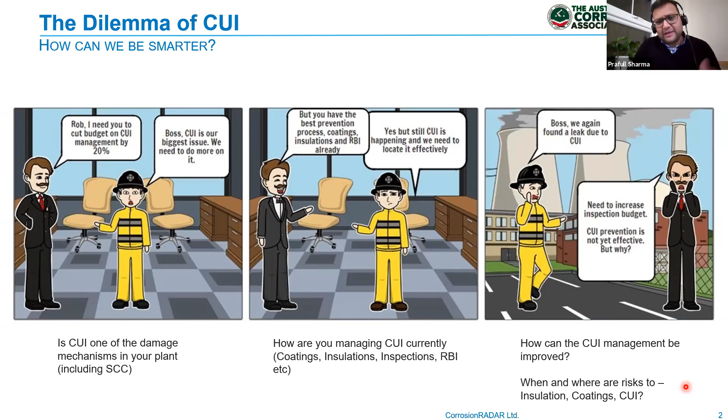It's a systems issue. So what is this CUI? Corrosion under insulation. I'm sure there are a lot of experts out there who know much more than me on this topic, but CUI is among the top asset integrity issues.

Australia is no different in this aspect, but these are global issues. It's not only tropical climate in Southeast Asia, it's not only South America, it's still in America as well, USA, Canada. We hear about this problem widespread in Europe and the Middle East. So CUI is among the top asset integrity issues in oil and gas and petrochemicals, and now we hear it's also a big issue in other industries such as fertilizers and chemicals.

And now due to energy transition, people are still forward thinking on that. The majority of pipeline failures have been reported due to CUI in various shapes or forms. And in the case of offshore platforms, especially when we talk about the North Sea, more than 10% of the overall maintenance budget goes to CUI. So you can see why this topic is so important.

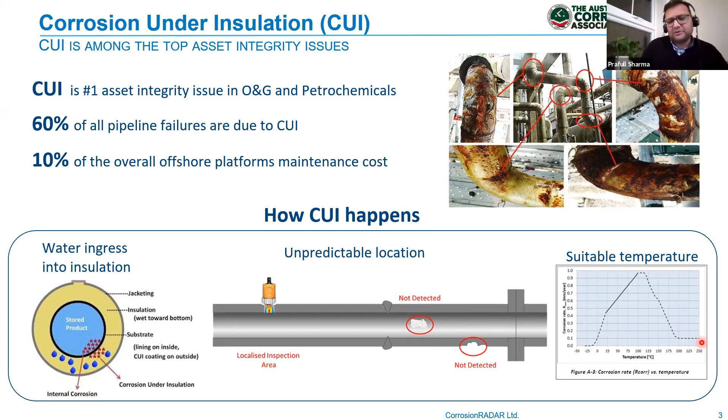But there are intermittent operations as well. Sometimes, for example, in the case of dryers or dehydrators in petrochemicals and gas processing, which go from minus temperatures to plus temperatures because of the nature of the operation. And it's a very, very bad, severe issue of CUI there, because coatings don't like these oscillating temperatures. So that's on CUI.

Now there's another element here, the predictive corrosion management. The world is moving towards predictive corrosion management rather than reactive, and it's being enabled by analytics, predictive analytics, and industrial IoT. I'm going to talk about that today from a CUI perspective.

The context of that is the current practice of management of corrosion is mainly through human judgment and risk based methods, combined with periodic manual inspection. Basically, it's reactive maintenance in the sense that the corrosion might have already happened, or it can lead to unscheduled shutdowns, so there's a safety risk. It's not a foolproof method, and it's very expensive.

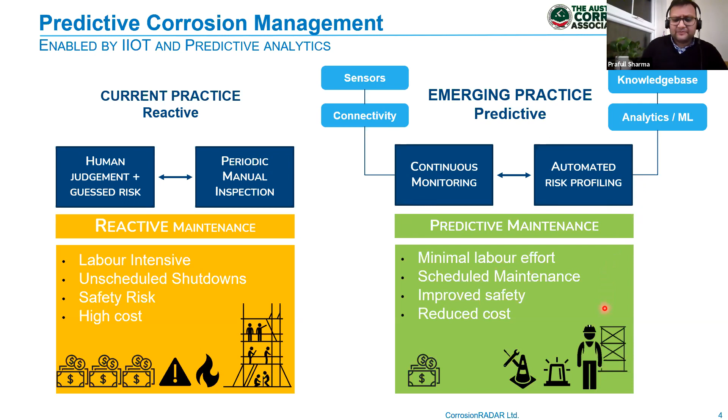Now people have moved to preventive methods, and now the emerging practice is predictive methods, where even online methods like sensors provide continuous monitoring, combined with knowledge bases and industrial guidelines to do automated risk profiling of the assets. This risk profiling means condition-based assessments, and the inspection can happen after that in a more informed manner rather than a reactive manner. So this is predictive maintenance to minimize cost and increase safety, and this is the new era which we are seeing.

Now, how does this happen? This is an example of what I represent, corrosion radar, but there are many other similar examples of monitoring through sensors. In this case, this is a CUI monitoring system invented by Corrosion Radar, a spin out of Cranfield University in the UK, where the original research and development happened. You see the sensors shown in orange colors.

They effectively cover a wide, long range. They're placed in various ways, helical or straight length, or even mesh or ring fashion, mainly to cover the assets and detect either moisture, so there's a moisture sensor, or in the same form factor, a corrosion sensor. This gets connected to electronics, which collect the data and transmit wirelessly to dashboards. It's a battery powered device and electrically powered device as well. Various wireless protocols are possible, but the unique benefits here are long range and spatial coverage, flexibility, and a decision management system with software.

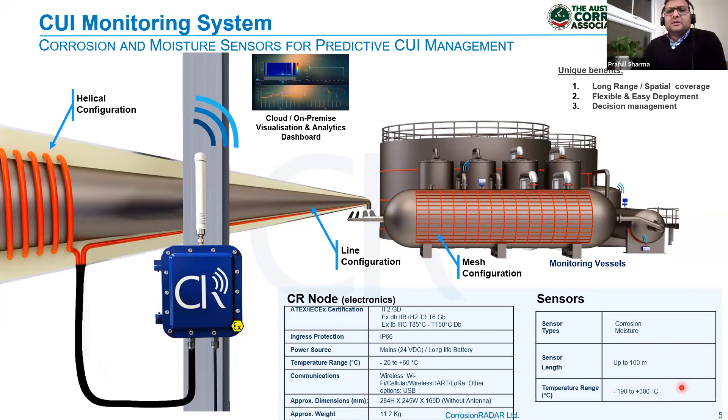So what is the principle of the electronics, the principle of measurement here? The core sensing principle is called electromagnetic guided radar, EMGR. This is a patented technique by Cranfield University and subsequently Corrosion Radar. It is based on wave reflection, or time of flight—basically electromagnetic wave reflection time of flight—to locate moisture or corrosion on the sensor.

So in this case, hypothetically, there's a pipe in black color, and at the top, the sensors are in close proximity to the pipe. You can see two hotspots getting developed, which are two risky locations, possibly due to water ingress at these locations. The moisture sensor: once water touches it, the local impedance of the sensor changes. It need not touch the pipe—the sensor is detecting everything on itself, so it's a kind of proxy to the pipe. The signal looks like a reflection, a peak signal coming from there, and based on the distance, it is located exactly where it is. That's where the inspection can happen. So it's a risk localization tool.

Happy to say that this technique, EMGR, recently got an award at the Corrosion 2021 conference for the MP Innovation of the Year award.

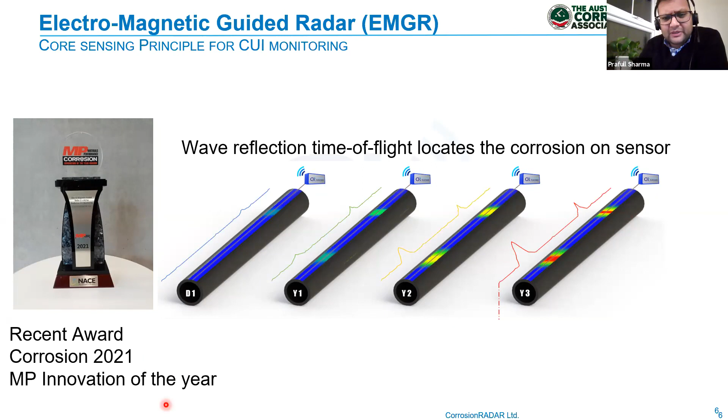Now what it enables is the era of risk-based assessments, especially dynamic risk assessments. Let me explain this a bit more. This is about optimizing inspections and increasing safety. What happens normally, on the left-hand side, is risk-based assessments or risk-based inspections. RBI is a standard practice in the industry, but it's very static—once you do it, it doesn't change over time. However, the risks are changing over time and we don't capture it.

So that's the problem. In this case, hypothetically, there are three assets, for example asset 1, 2, 3, and they have different risk profiles—consequence of failure and probability of failure being low, medium, or very high. Now this in year 1 will look very similar to year 5 or year 10 unless it is updated manually, and it's a huge exercise if it needs to be updated.

So this is not periodically updated, does not reflect field conditions, and so there's a scope of optimization.

Now the new era using sensors and online monitoring can convert moisture sensor data into risk assessments, and we have the ability that every year automatically the risks change from low to, say, in this case, if water comes in, it becomes high. In case of very high risk assets, it becomes low because no water is there, etc.

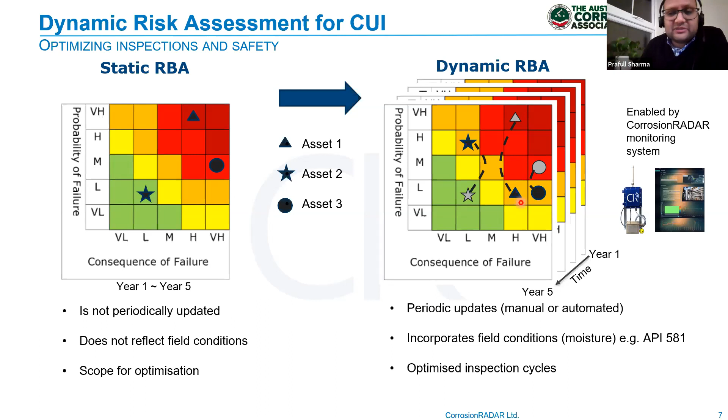So it's periodically updating manually or automated and incorporating industry guidelines like API 581, and this can optimize the inspection cycles. For example, asset number 2, which originally had low probability of failure, would not have been inspected, but now it is high, so it needs to be inspected at some point because it's a safety issue. Similarly, asset 1, which was very high, becomes low, meaning inspection is unnecessary because there's no evidence of water or risk there.

Now, how does this happen? The probability of failure in this example uses RP-G109 DNVGL guidelines. Similarly, API 581 is another guideline. Normally, the risk assessment uses a 5x5 matrix of probability of failure and consequence of failure.

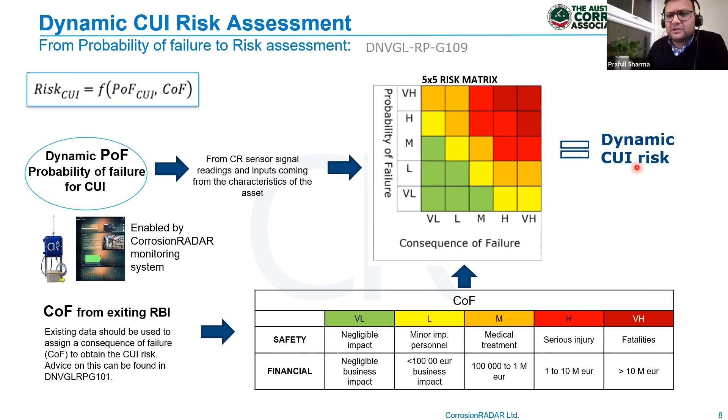The consequence of failure does not change over time—it may be safety or financial, depending on the type of asset and fluids. But the probability of failure can change over time because of water ingress and changing conditions, and that's what makes it variable rather than static using monitoring. That's what enables dynamic CUI risk assessments.

Now, these are examples of risk localization. So I talked about dynamic risk, but this is now a second step—localization of risk for optimized inspection scoping. This example shows integration of corrosion radar technology with CUI risk assessments based on API 581. There are two scenarios here which can help.

On the left-hand side is avoiding over inspection. There are two pipes here with a similar profile, but one shown in red color is very high risk. Red means very high. The conventional inspection scoping using RBI will very likely say this needs 100% visual inspection, which means removing the insulation—expensive. But if we combine it with monitoring, sensors installed are saying that, yes, RBI is saying red, but the sensors are saying these are green conditions.

There's no water or humid condition inside, but there's a slight issue somewhere in the middle—it's a medium type risk using API 581. Now, if we combine both pieces of information, we can optimize the inspection so we need not inspect all of it—we just need to inspect probably that one meter. So that will avoid over inspection.

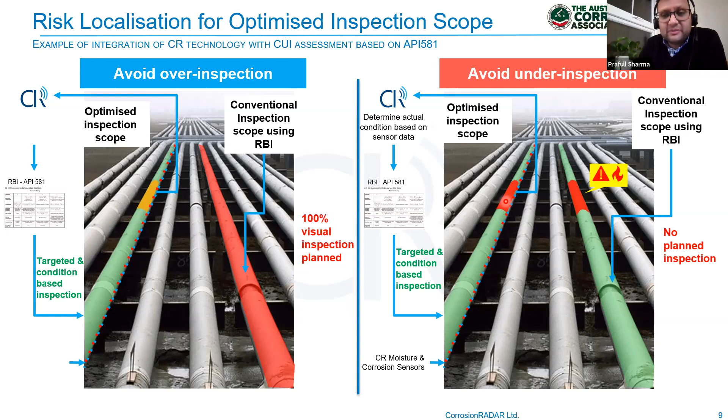And then it will recommend that, yes, it is indeed right that it's green, but no, there's a red condition developed locally. So go and inspect it at some inspection interval—this needs to be inspected for safety reasons. So this is the next step of combining with RBI: how can we take condition-based data to effectively define the inspection scope?

There are a few case studies I'll go through. This is a case study generated by the NZTC—it used to be called OGTC in the UK, Oil and Gas Technology Center. It's a consortium of North Sea oil operators and the government to validate and promote technologies.

So you can see over time the corrosion location, where the water was. You can really see the corrosion happen on the pipe, but also there is corrosion on the sensor, because the corrosion sensor is a coupon.

It's the longest coupon in the world. It self-corrodes, and then it detects where that coupon is getting corroded. Similarly, the white color is a moisture sensor—it detects where the water is touching the sensor. So the results of that are shown in this way here.

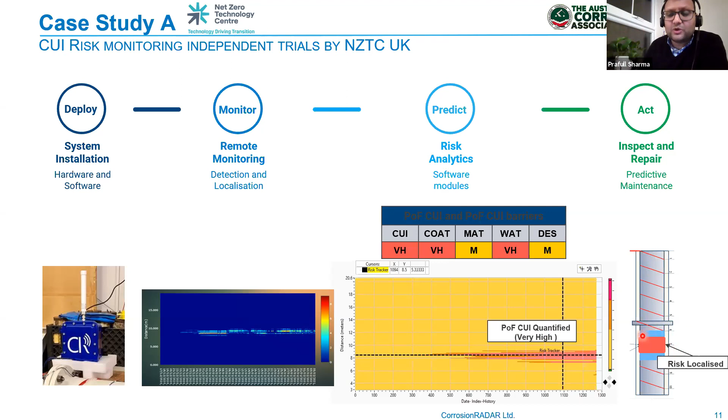And then the next step is to localize it—to say, hey, it is actually at this location, which is 8 meters from the electronics, and it is increasing over time with a very high quantification probability of failure. Finally, it is localized to an actual pipe: okay, this is the location where the risk is. If the inspection needs to be planned for the next 5 years, this is the location to watch out for, rather than the whole pipe. So this is how the optimization is achieved.

This is another case study. Corrosion Radar is partially owned by Saudi Aramco, so this is a published case study from there. This is a dynamic risk assessment of an LPG pipeline operating at minus 45 degrees Celsius in an arid climate in Saudi Arabia.

You may ask, hey, at minus 45 degrees Celsius, there's no CUI, there's no corrosion, but this goes through intermittent operation. I think this is a buffer unit, so it's sometimes shut down and goes to atmospheric temperature. That's where the foam glass insulation can absorb moisture inside, trap the water, and condense it on the asset.

So this system was deployed there, and again the similar process of system installation, remote monitoring the water. Actually, water was injected by the end users to do a validation and approve the technology. So in this case, periodically the water was injected at a particular location and it was detected rightly.

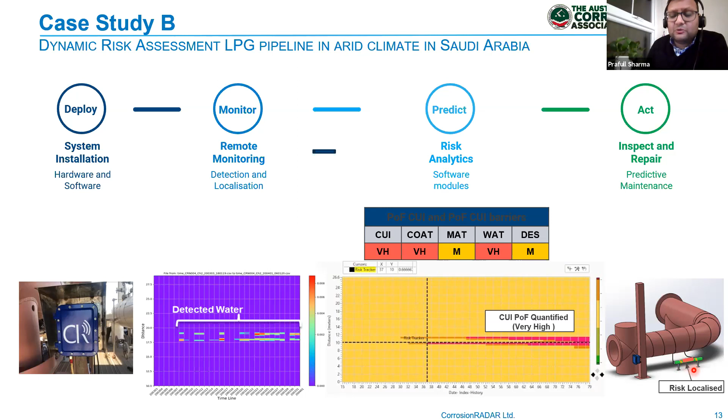Subsequently, the risk assessment detected a very high, aggressive condition, and localized it to a particular pipe route—the sensor was routed through a particular pipe for tests. In this case, again, the inspection would have happened at that location. So this is another case study.

Now this is case study C. I would say this is among my favorite case studies because it's closer to home—it's in Netherlands, and it's a production column. Now we are seeing a lot of interest in production columns or dryers and dehydrators. In this case, it's a 25 meters high production column.

This production column had a history of CUI, and the asset owner had to put up scaffolding every few years—I would say every 5 or 6 years—to do the inspection of CUI. I think this is a pressure vessel category which needs regulatory-driven inspection periodically.

But then they said, okay, we want to avoid that scaffolding, so we need to move towards condition-based monitoring. And that's where corrosion radar sensors were installed. You can see the orange colors on the top and orange color on the bottom, in a helical fashion, then connected to the electronics in the middle, the blue box, transmitting data on the cellular network.

You can see the pictures of the sensors which are wrapped around the asset with the mineral wool insulation, transmitting data. Now the objective here—we have not detected anything on this asset so far—but the objective is, if nothing is detected, they will skip an inspection cycle and save a cost.

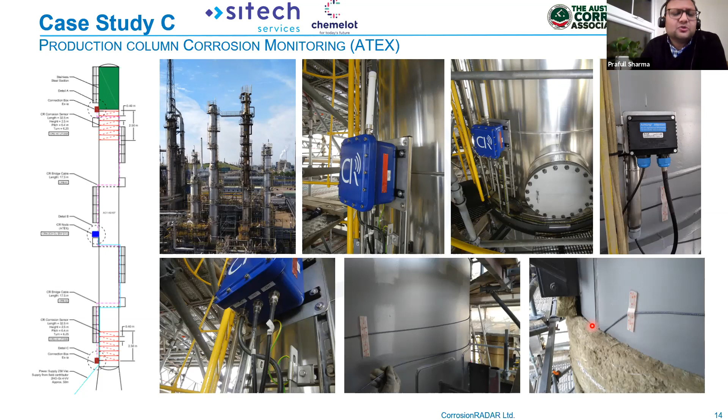But if something is detected, it will be highly localized—we will be able to say the angle and the height of that corrosive condition—and the inspection will be done through rope access rather than scaffolding, at a targeted location. This is a huge cost saving if it happens. It's been 3 years since installation, but so far no corrosive conditions, so it's good news for the asset owner.

So I would like to summarize what I talked about. It's about predictive CUI monitoring. I would go one step further, with moisture sensors and/or corrosion sensors, either or.

Now this is leading to data-driven RBI. We call it dynamic RBI, rather than a static process, making it dynamic and more informed for optimization of inspections. But also, if some people are not following RBI, it's fine. This is still early risk detection, leading to reduced unplanned shutdowns, predictive maintenance, and finally CUI prevention, because some of the asset owners, especially in Norway and Europe, are starting to say it's better to prevent rather than inspect.

Prevention is normally done through coatings or better insulation, but if we know there's wetness going on inside, then probably prevention can be done by mitigating that wet condition, because so far the industry is struggling with water protection. There's only so much we can achieve with coatings and best practices of insulation. So this is more of an assurance, additional monitoring tool, even for critical assets, to achieve efficiencies.

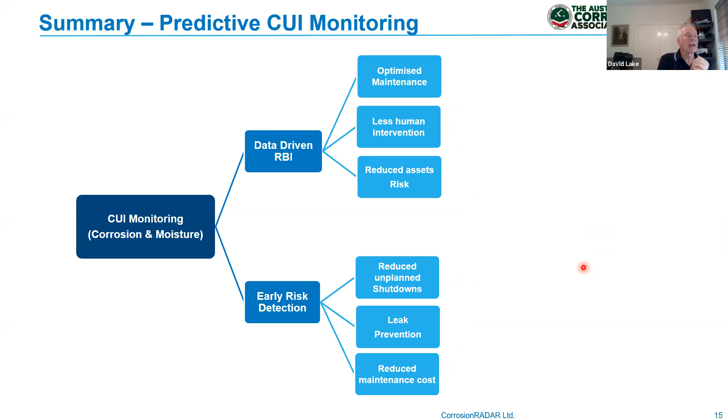That's a very good question. Normally we would suggest that because we are monitoring the pipe surface, it should be close to the pipe surface. For the operation, that's not a necessary condition, but it's an ideal condition if we can put it on top of the surface. However, there is a galvanic disconnection between the asset and the sensor because there is a plastic sleeve between them. So the ideal location, even with foam glass insulation, which I'm showing here as an example, is sensor directly on the asset surface and then foam glass insulation, because the foam glass insulation is closed cell. That's an ideal condition for installation.

So can it be installed further away and you still get meaningful results? The sensors function normally, they can even function outside. We test them on a normal table, so they function normally. However, the assumption here is they should represent the corrosive condition of the pipe or asset. So the closer we place them to the asset, the more realistic results they give. If we place them far away, the conditions they detect will not be representative of the conditions seen by the pipe. So it's ideal to have it in proximity to the asset surface.

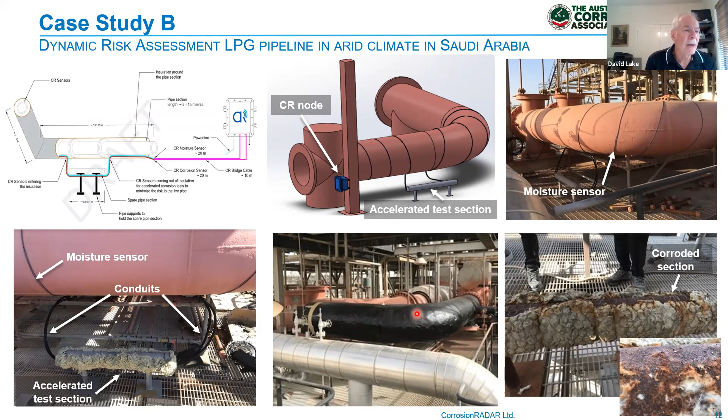Okay, and we have a question here around the pipe supports and how we manage around those areas.

Yeah, so this is, as I said, very similar to installation of a heat tracing system. So even when a heat tracing system goes around pipe supports, or in this case I'm showing a flange, the sensor goes around the flange in the same way, with an additional buffer length of the sensor. Again, the heat tracer also goes around it with an additional buffer length. So every installation is designed on site as to how the sensor layout is, with the pipe support being accounted for—it is installed in lieu of where the pipe support is and goes around it.

Now that's on the installation of the sensor. However, pipe supports, nozzles, or flanges are an interesting case of complex geometries leading to CUI, because that's where water goes in—that's a weak link. That's where moisture enters at the pipe supports, where insulation is slightly open and not perfect. So the sensor needs to be placed and routed through those locations to realistically cover high risk locations. I hope that answers the question of not only installation, but also routing it through those pipe supports and critical locations.

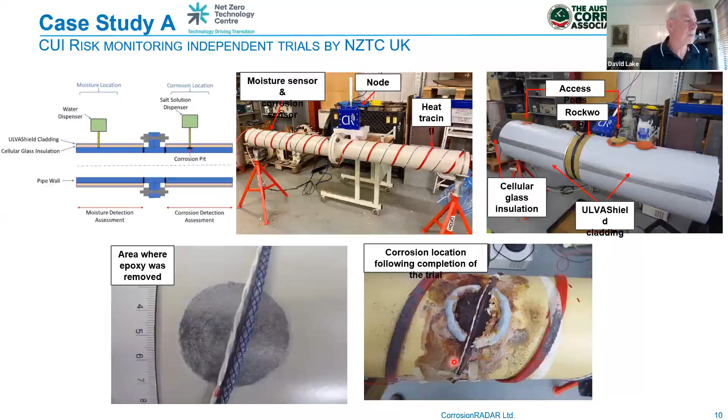Okay Praful, I'm afraid we've run out of time. Thank you very much for your presentation. There are a few more questions which I'm sure can be accommodated. You put your email address up at the beginning, and for those who don't know, it's very, very late in the UK, so Praful's probably going to leave us and go get some sleep now. So thank you very much for your presentation, Praful. It's been interesting, and I'm sure a lot of people will consider it on their high-risk piping and vessels. So thank you very much. Thank you for the opportunity, and feel free to contact us or Andre from APTS, and we will be happy to interact and talk more. Good, thank you for the opportunity. Pleasure.

Our next presenter is Dr. Thunyaluk Pojtanabuntoeng. Kod, we all know her and lovingly know her as, and Kod, you can correct my pronunciation. Yeah, no problem, you're not the first person to, you're not the only person. Okay, having trouble. Okay, just let me finish the introduction.

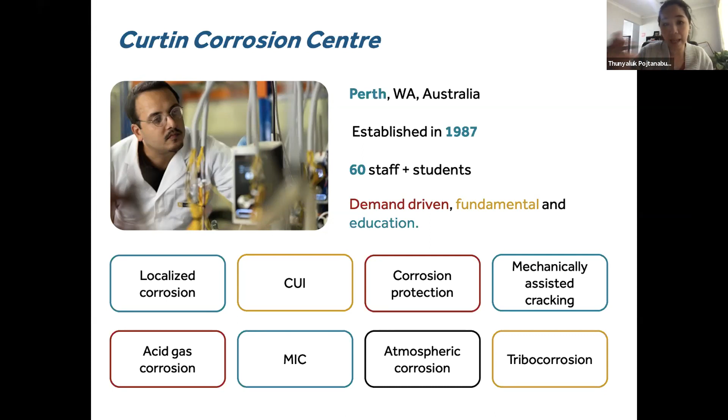Since 2014, 2015, we've been growing in terms of the number of projects related to CUI, corrosion under insulation, CUI. At the moment, we have 6 people working on this topic.

So we have Dr. Yang Hou focusing on corrosion monitoring with machine learning and the electrochemical noise method that she's focusing on. And we also branch out to study degradation of coatings, as coating is one of the key barriers to CUI.

So Qing, Janice, and Saleh are working on coatings and the degradation of coating under high temperature and when coating is applied on different substrates such as carbon steel and stainless steel. These are the topics these three are working on. And Nicholas is our new postdoc, and he's working on thermal insulation coating as another way to mitigate CUI.

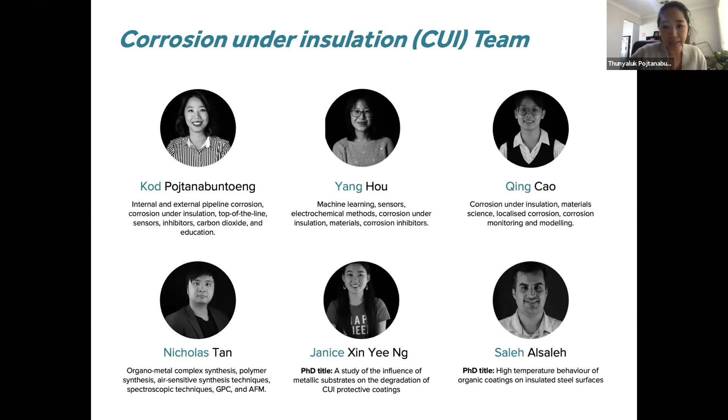Just focus on today's presentation.

The key takeaway I would like to highlight is that insulation materials affect the risk profile of CUI, and the aging of the insulation material is critical to changing that risk profile. When we introduce fresh insulation, it is not necessarily the same as that insulation 2 years or 5 years after installation. Critical properties such as water uptake, water retention, or leaching of corrosive chemicals from the insulation will change over time, affecting the risk profile.

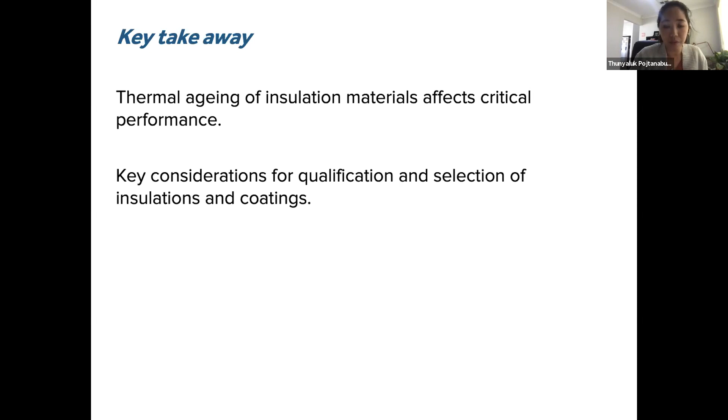Also, when we look at ways to prevent CUI, protective coatings is one of the key components, and there are a few key considerations for qualification and selection of coatings that I would like to highlight in this presentation.

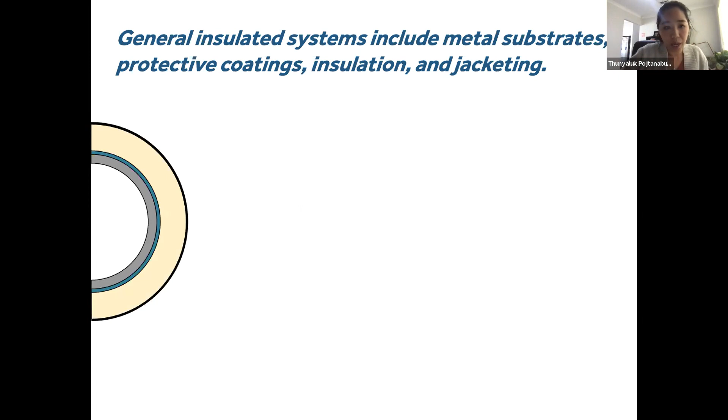We know insulation materials can affect CUI in different ways. First, due to different water retention properties, it can prolong the wet time, creating an enclosed environment where water can be trapped and corrosion can proceed undetected. It can also leach corrosive chemicals such as chloride, fluoride, or sulfate, or leach inhibitive chemicals such as silicate or pH-neutralizing compounds that increase the pH of water when it enters the insulation.

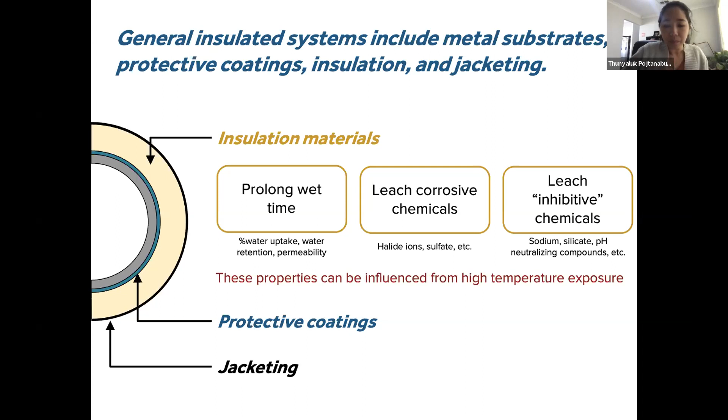These properties can be influenced by high temperature exposure, which is not generally provided to asset owners or end users in terms of how the thermal aging of that insulation would be. The protective coating is also a key component in the insulated system.

So first we look at insulation materials. There are a few guidelines or acceptance criteria for selecting insulation materials, the first being ASTM C871 and C795. These two standards go together - one specifies how to test the leachable ions of insulation material, and the other provides a specification for use with austenitic stainless steel.

In the domain diagram, it provides an envelope of where insulation is acceptable in terms of leachable ion content - a ratio between chloride and fluoride versus sodium and silicate. High concentration of sodium and silicate leads to a more inhibitive effect, within the acceptable range. On the contrary, if the insulation leaches chloride ion to an unacceptable amount, it falls out of this envelope.

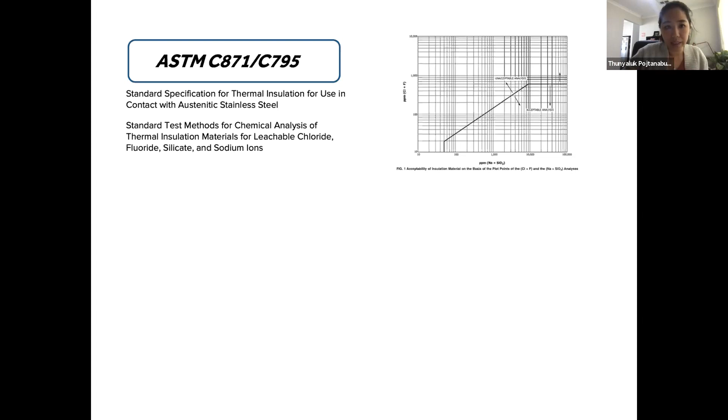Another guideline used is API 583. There's a figure in that standard showing the ratio of chloride content with operating temperature and compatibility with different materials with respect to the risk of stress corrosion cracking.

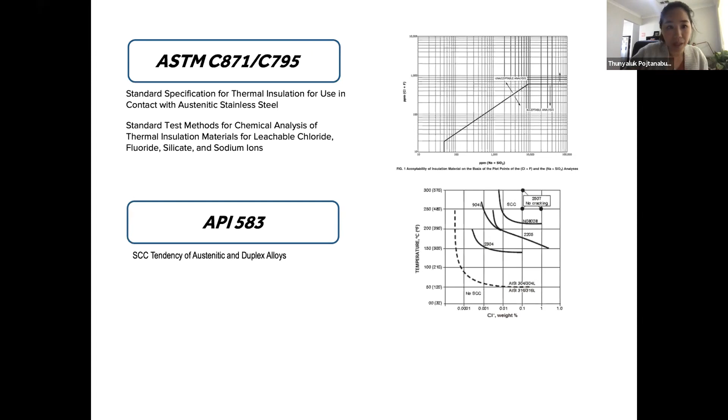The EFC guideline number 55 also suggests that acceptable insulation material should have a halide ion content - in this case both chloride and fluoride - less than 15 ppm, or a pH between 7 to 10.5. These are the existing industry guidelines for asset owners or end users to rely on when selecting insulation material for different applications.

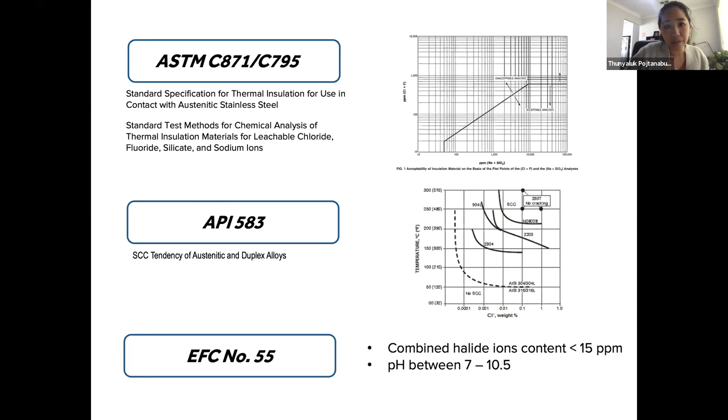We can see that it focuses on chloride and pH. So what we're trying to do here is look at different types of insulation materials to see whether or not it changes in terms of chemical properties, and how it affects the susceptibility to pitting corrosion of 316 stainless steel. We ran cyclic potentiodynamic polarization at 80 degrees with 316 stainless steel.

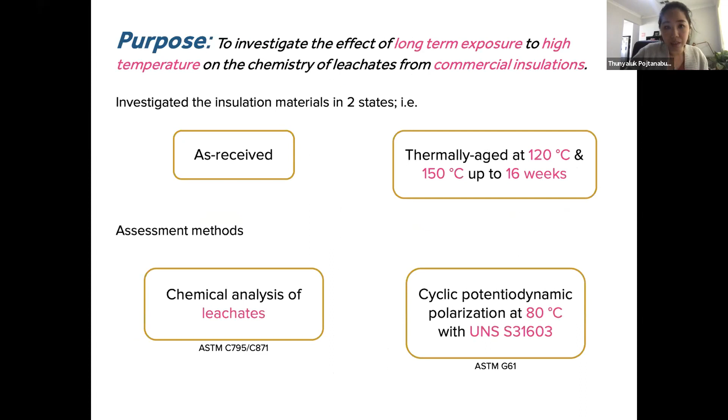We tested the insulation as received and as it's thermally aged. Let's look at the first insulation, insulation A, which was fibrous mineral wool insulation. We can see that all of the insulation didn't change much in terms of pH, but insulation A had a significant drop in pH with aging time.

If we take the fresh insulation at aging time of 0, all of the insulation would meet the criteria provided by EFC that pH should be between 7 to 10.5. But particularly in insulation A, the pH dropped significantly. After 8 weeks, the pH came down to about 6.5 and stayed steady around 6 to 6.5. This suggests that during thermal exposure of insulation A, there is some change in chemical composition, either degradation of the additive that leads to leaching of acidic chemicals.

If we would just take information from the fresh insulation, we would miss this potential change in the properties of that insulation.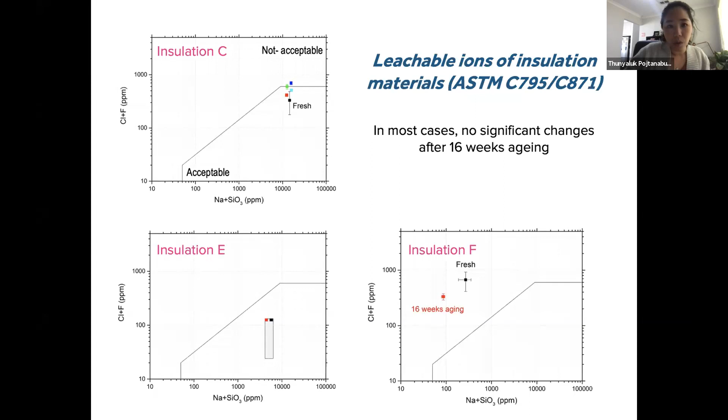So with this risk of the chemical composition, we also ran the cyclic potentiodynamic test because the chloride content will affect the susceptibility of pitting corrosion. In this case, we look at 4 different insulation materials from fresh insulation, and the leachates were spiked with 500 ppm chloride. The reason we spike with chloride is first to enhance the conductivity of the solution, and second, past projects with insulation from the field show that over time chloride will enter the system anyway, so introducing chloride content is not unrealistic. What we can see here is that different types of insulation material can lead to a different risk in terms of pitting susceptibility.

There are a few features on the cyclic potentiodynamic scan that we generally look at. The first one is called hysteresis. Insulation D shows what we call negative hysteresis, meaning the material is not susceptible to pitting corrosion because the reverse scan has a lower current compared to the forward scan, meaning the passive region of the stainless steel was still intact even after polarizing anodically.

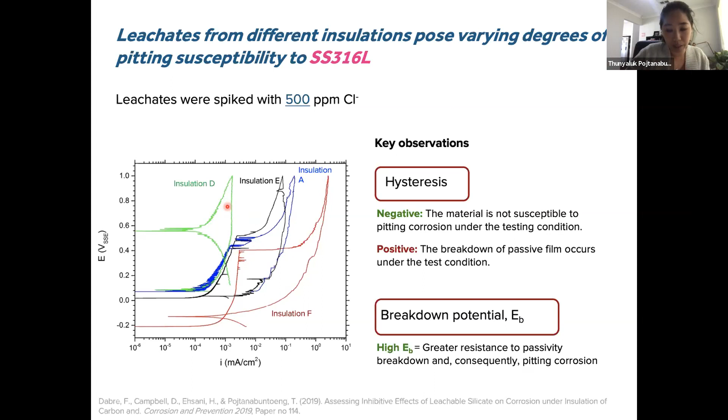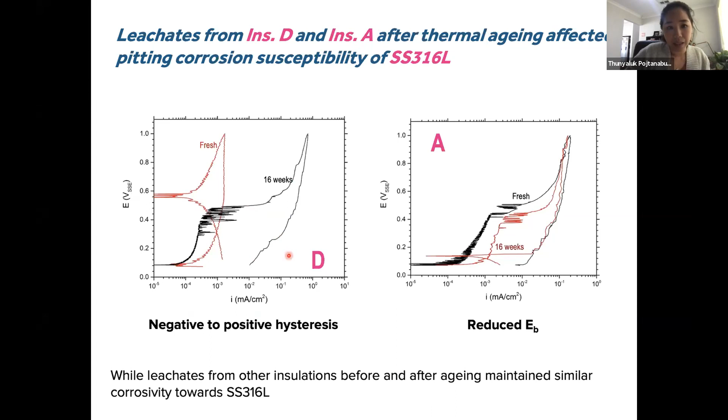There are a few other characteristics we could obtain also from the graph, but the highlight from this slide is to show that different types of insulation material provide different pitting susceptibility. When we increase the thermal aging of the material, in the case of insulation D, when it was fresh insulation there was no hysteresis found, so the breakdown potential was not obtained. But we repeated the same test with thermally aged insulation, and what we see is a significant drop in the breakdown potential, showing that over time, after aging to a certain degree, the insulation can change and provide different risk to the substrate.

So this is a highlight of the insulation part of the presentation, to show that high temperature exposure affects the pH of the solution. It affects the concentration and types of leachable ions. It also affects the pitting susceptibility of stainless steel.

What we could look at, how we can use this study in the field, is that when we receive the product data sheet, for example, we have more questions to ask the vendors in terms of what is the risk of thermal exposure? Is the insulation material thermally stable? And can we have other tests that are not currently used in the guidelines, as a screening tool to compare the potential risk and corrosivity of those insulation materials?

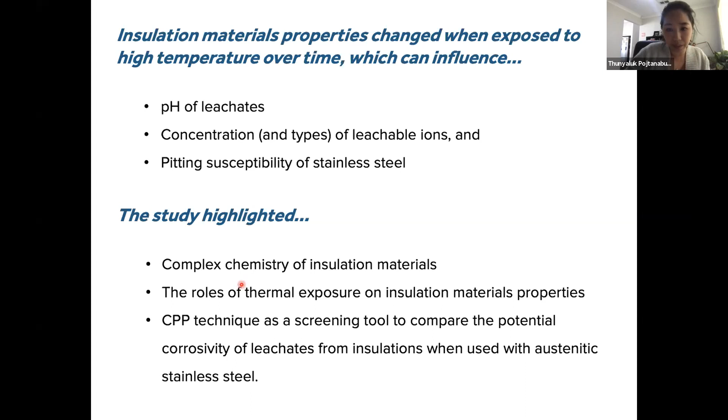So on the coating side, which is a key barrier for CUI, at the moment in the industry there are two standards: one is NACE and one is API, and they both refer to these two tables, showing the selection of coatings at different operating temperatures. For example, if the temperature is somewhere between 100, there are a few coatings, coating classes, that could potentially be used.

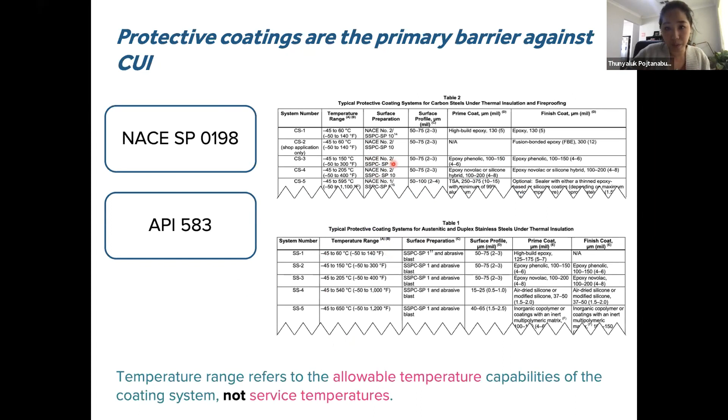But there's only one industry guideline in terms of the qualification, and that is ISO 19277. These guidelines provide qualification methods for coating for use under insulation. This diagram shows a summary of the test methodology provided in this standard.

First, they suggest that the coating should be artificially aged to simulate different conditions, such as when the coating is applied as module, and then it takes a while before the component gets insulated. So that coating could be exposed to UV or salt spray for a period of time. That is step one, which is artificial aging.

And then the CUI exposure, there are 4 types of tests provided in that standard. There are 3 tests that are not required to use insulation, and only the Houston pipe test, outlined here, suggests that the coated sample would need to be insulated with whatever insulation is to be used.

We can see that the standard focuses on the thermal cycling of the coating, because we know that temperature fluctuation of the coating is a way to accelerate the coating degradation. So what the standard basically simulates is the dry heat, water immersion, water evaporation, and the thermal cycling. It does not simulate the interaction or the compatibility of coating and the insulation material.

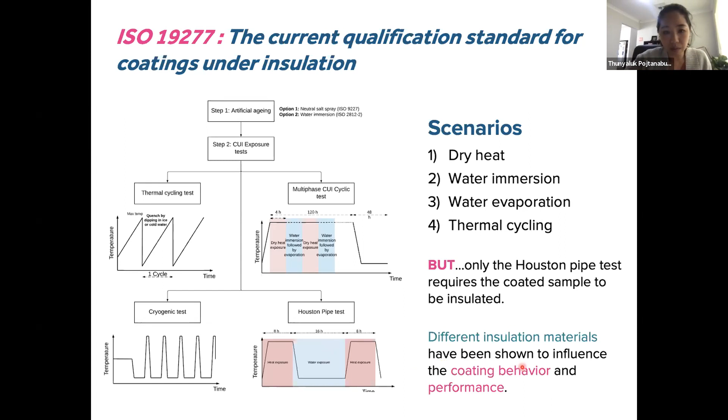Houston pipe test is only there in the standard as an optional test. It's not required. But there's a study done and presented at NACE a few years ago that shows that different insulation materials will affect the coating behavior and performance. One of the coatings studied in that conference paper showed it performed much better when insulated with calcium silicate compared to when it is insulated with mineral wool insulation. So that is something to take into account when looking at the qualification of the coating.

Also, when we look at the way for coating to be assessed after exposure, there are different ways to look at it. We look at it from the corrosion protection point of view, the visual appearance, chemical properties of the coating, and so on. But only visual appearance and degree of blistering, degree of rusting, cracking, and so on, and the adhesion strength value are commonly used. The other assessment methods are not usually provided or presented when it comes to coating qualification.

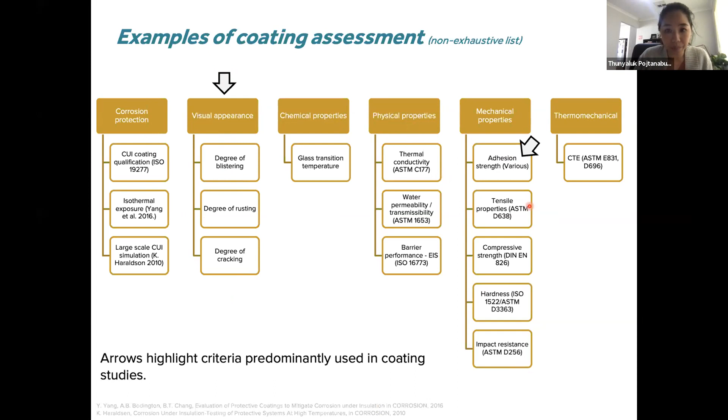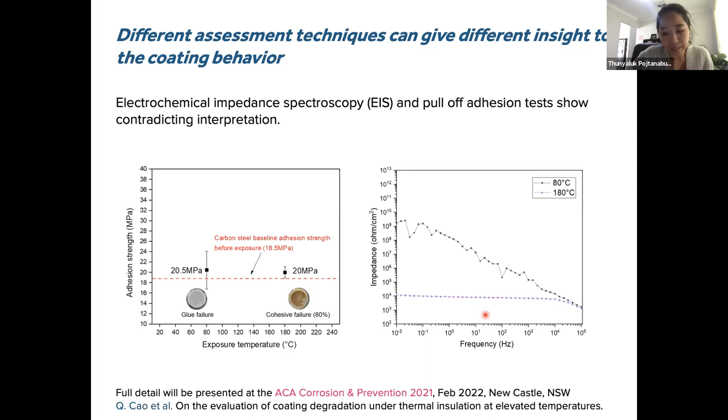On the right-hand side, this shows the difference in the EIS run on the pipe section at 80 degrees and 180 degrees. We can see a significant difference in terms of the coating behavior from the EIS data. So the test is still ongoing in terms of the project, and we're still looking at different types of assessment techniques. But what it shows is that the selection of the coating qualification test is important.

It should be simulating the CUI conditions expected in service. So if it is going to be used with insulation and with different types of insulation, that coating should be studied in conjunction with that type of insulation material, and look at a more appropriate and comprehensive way of coating assessment techniques to obtain different parameters, different properties of the coating, to be able to understand the coating behavior, performance, and degradation mechanism of that coating.

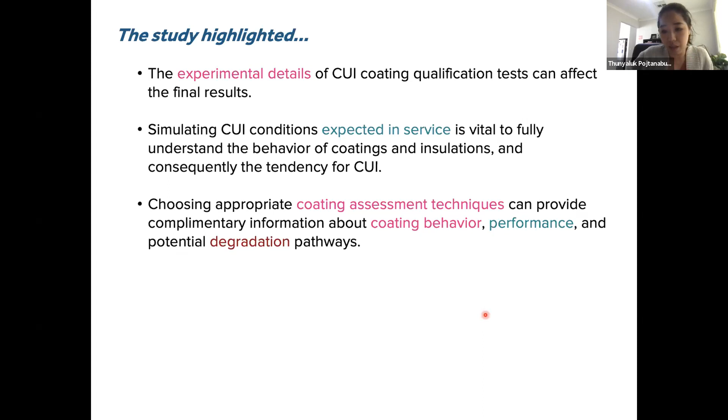Just a slide to show what we are doing as part of the QEERI-Curtin Alliance: we're looking at the different effects of substrates, carbon steel and stainless steel. We are trying to develop a systematic test protocol for evaluating coatings, particularly at higher temperature, to look at mechanical properties of the coating and correlate with the degradation mechanism from the mechanical point of view. We're also trying to develop test apparatus from lab scale to outdoor field-like exposure.

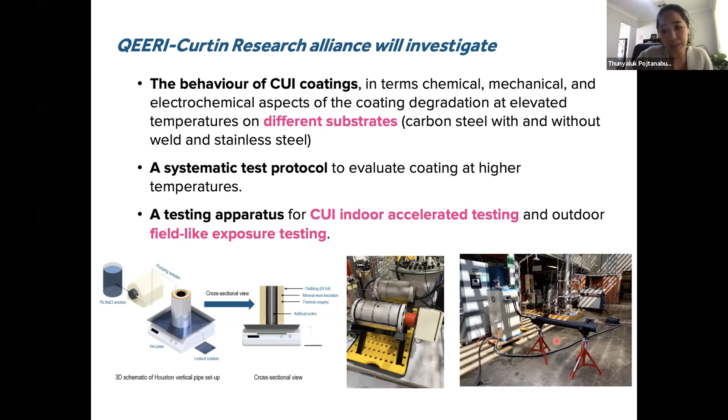So here is the outdoor exposure. There will be 4 pipes fitted with an overhead sprinkler to simulate wet-dry cycles in a more realistic way. Moving forward, we are working towards the CUI risk prediction tool from the mechanistic point of view. At the moment, we are trying to secure a few more industry partners, and the project will kick off in Q1 next year.

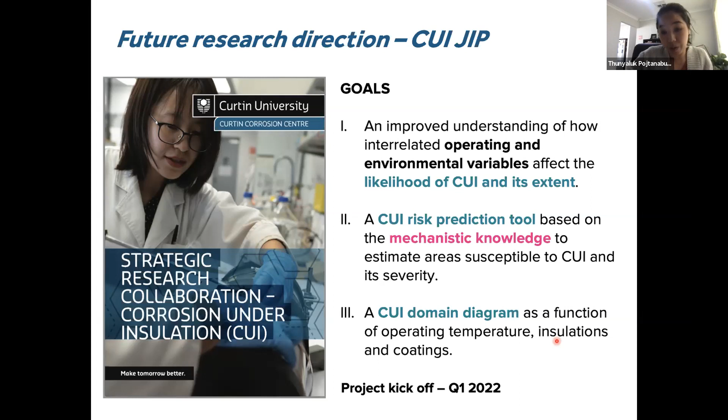Just a little explanation of what I mean by a mechanistic approach to CUI prediction: we break it down into the CUI processes - water ingress, water transport, and the corrosion process. All of these sub-processes have sound fundamental knowledge behind them. So we plan to look at these step by step, predicting water accumulation and water transport through insulation materials, similar to what's done in the residential or building industry. Then we use existing knowledge on the electrochemistry of corrosion to identify the rate and risk of localized corrosion in CUI.

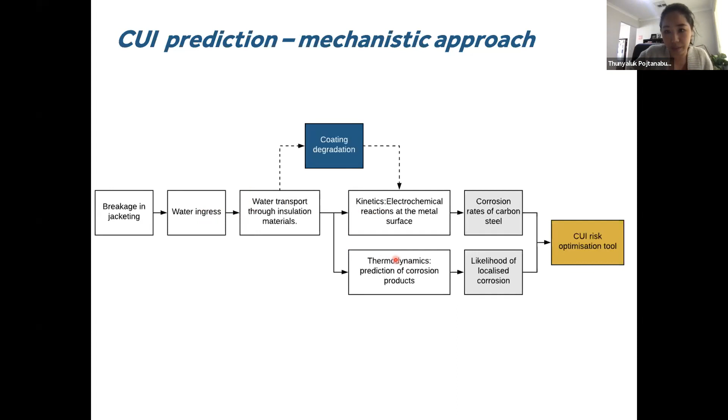That was excellent, Cod, and your timekeeping is almost superlative - a quick 7:01, 1 minute over.

One quick question for you on the insulation breakdown. I've never seen any of the suppliers of insulation give high temperature breakdown degradation properties of their insulation. How easy is that to find, or does it have to be done through your research?

I think it's not a difficult test. It's basically the test they should already be doing for fresh insulation, and they just have to repeat it with thermally aged insulation. In my opinion, they should provide that in the data sheet. But we can do it if you are interested, for a third party or independent lab to do it.

Do I have any other questions from anyone? It looks as though people are just thanking you for your presentation.

Cod, on the paint side and the corrosion failure through insulation breakdown, you still need the moisture to get in there, don't you? So this is a second level of risk rather than a prime risk.